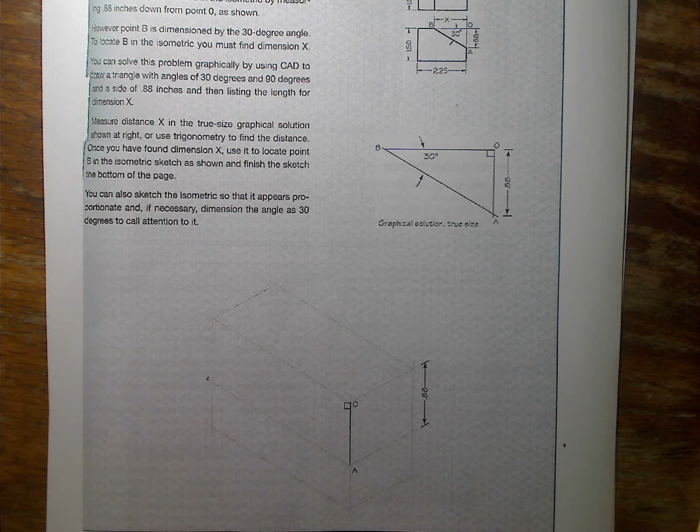Okay, our isometric drawing packet number 1 that we're practicing and learning. Now, isometrics, everything is switched, and if you pay attention to your grid paper, it's no longer the regular grid paper you've been using. Notice how everything's on the angle, because everything's on that 30-60 degree angle so that we can all draw isometrics, since everything is switched on this axis. But we're going to zoom out here.

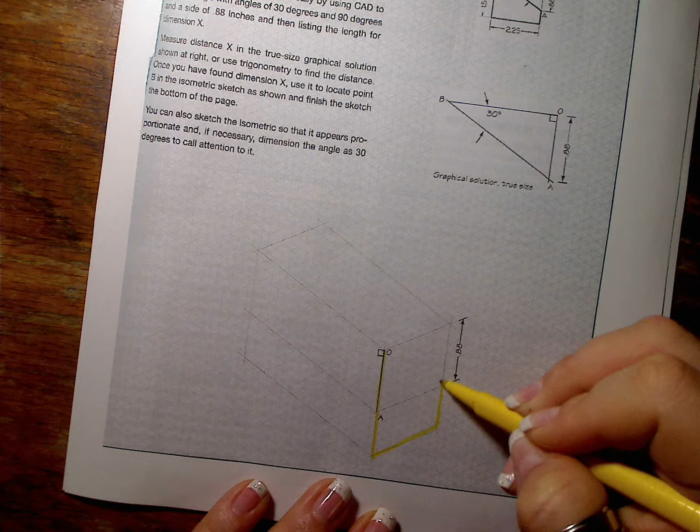Now what we're going to do is take these two views and transfer them to the box. So the first thing we do, my paper's nice and lined up, so we're going to block it in. The first couple of drawings I was nice, and I very faintly gave you that first box to start with. So that's the first thing I'm going to do, and again, always lightly draw this in. This is why I'm using the yellow, so you can see it better.

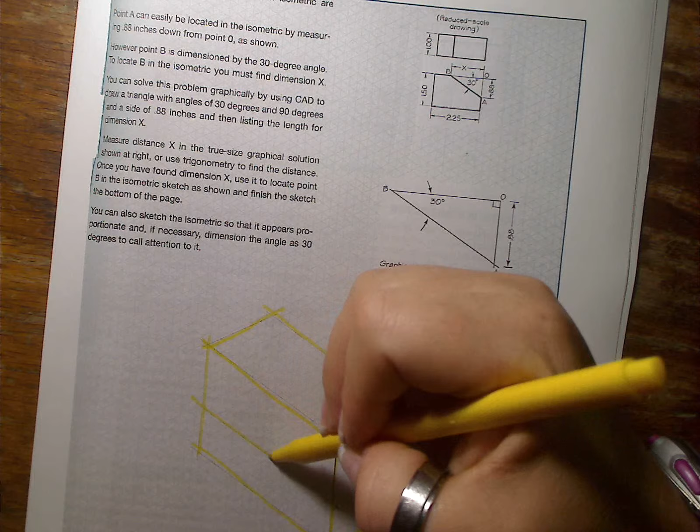Now I'm going to look at it and go, okay, what's my distance from O to A? If I look here, it says it's 0.88. If I look down here, I've already given you that distance, so we have that part right there. What we need to now get is that O to B, so we need to figure out what that measurement is. If we go through and measure it, we can figure that out, it's all there.

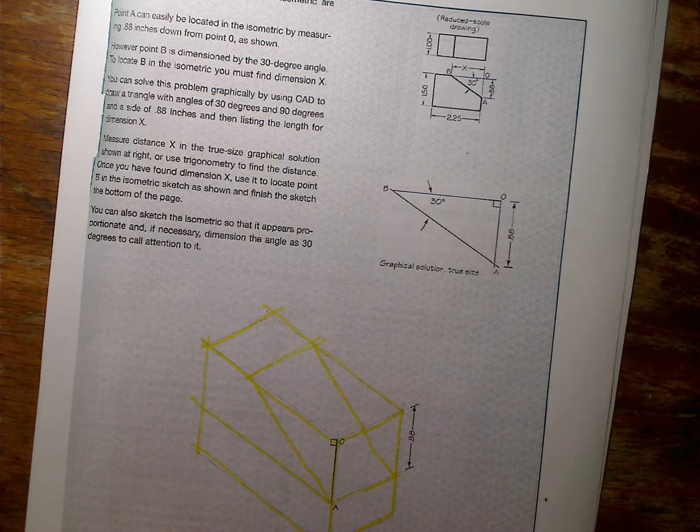What we're going to do is look at it and go, okay, if I'm doing an approximation and looking at it proportionally, what does it look like? Should go about right there. That looks proportional to that size here. Then I look at my front view and go, what does it look like on the front view? On the front view, it's an angle that comes down, so I have to draw that angle here. To continue and finish going through, I have to draw the angle in the back here.

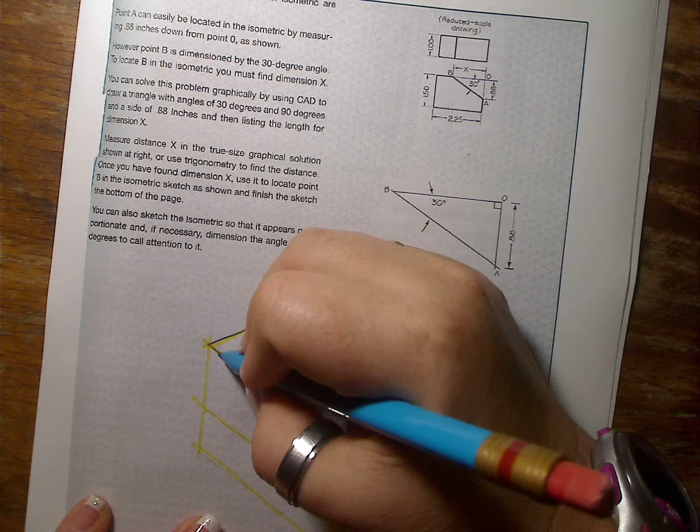So now we have a very simple isometric drawing, pictorial, that looks essentially like this. Remember, just get your triangle so you can draw your nice, perfectly straight lines. Never, ever, ever use a scale or a ruler because of the ridges on it.

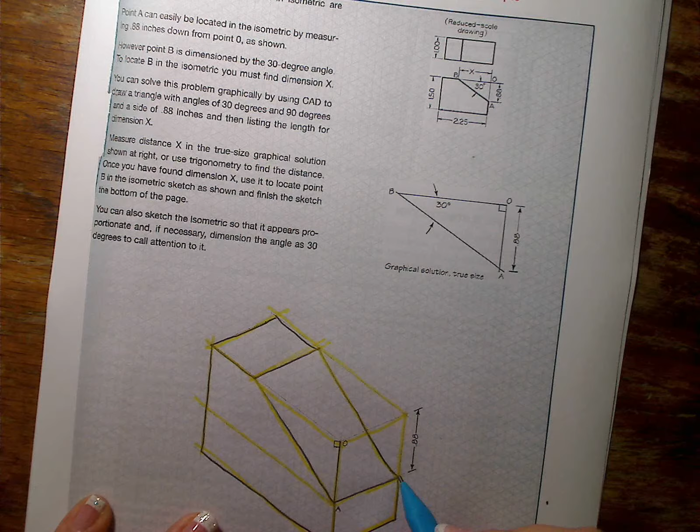Again, when you're drawing pictorials, sometimes we need them shaded just so we can see it better. And there's nothing wrong with shading. Shading is our friend at times.

All right, so we did the same thing for these. We want to draw this one. We are going to draw—I don't want to draw an oblique, I want to draw an isometric of this one. So let's go in, keep everything proportional. So I look at my box and try to figure out what my box should be.

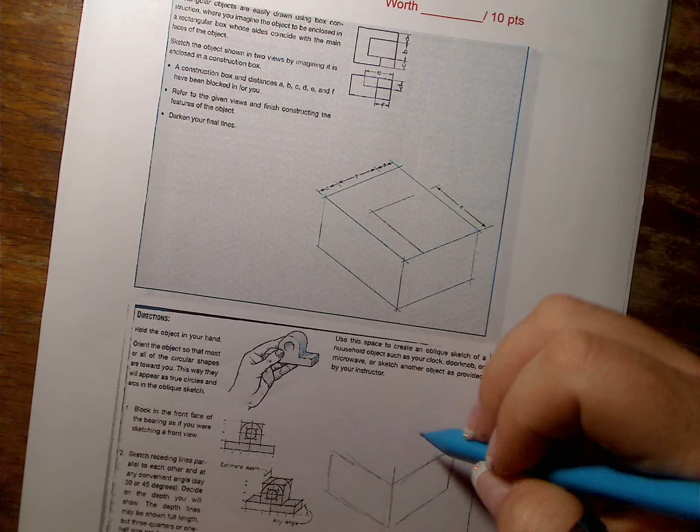Let's draw a... no, I don't necessarily like that one. So sometimes you may not like it, so that's why you always do it lightly so you can erase it.

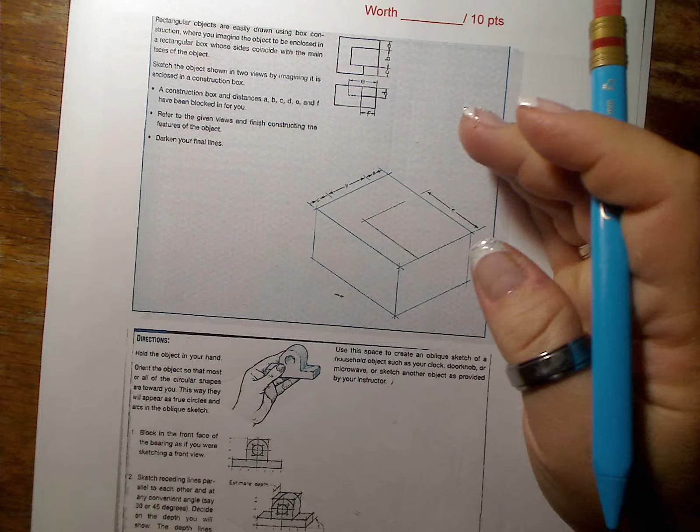Let's do a sketch, an isometric sketch of a coffee mug, just because those are pretty simple to do. Or we can do a soda can. Here, we'll do a soda can. So I'm going to proportionally sketch it, like if I was drawing a soda can here. This one I don't have to count, I'm just doing it proportionally, and looking at it, I go, no, if I'm doing a soda can, it should be nice and square, right?

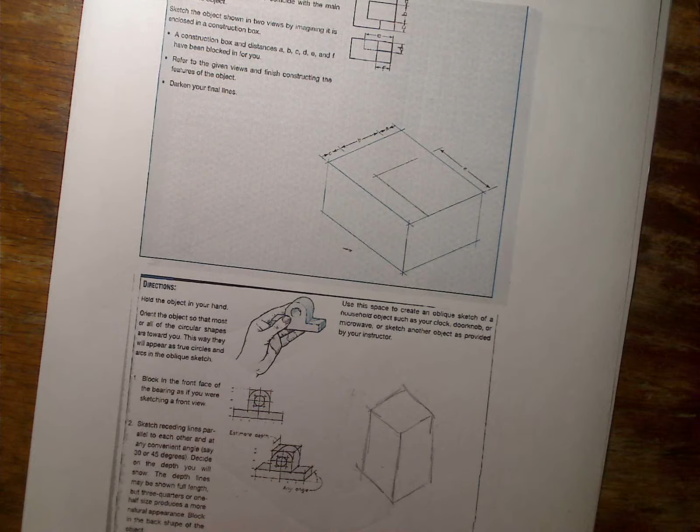So it looks something kind of like that. That's kind of my box. Let's go ahead and make it yellow.

We know a soda can, when we look down the top of it, it's circular. So I will need to find those center points. And then I'm going to have my ellipse that's going to touch in here. So I'm going to have it look something like that.

And then somewhere in here I'm going to have that opening. And I'm going to have that little tabby looking thing that goes on top of it. And now I need my body.

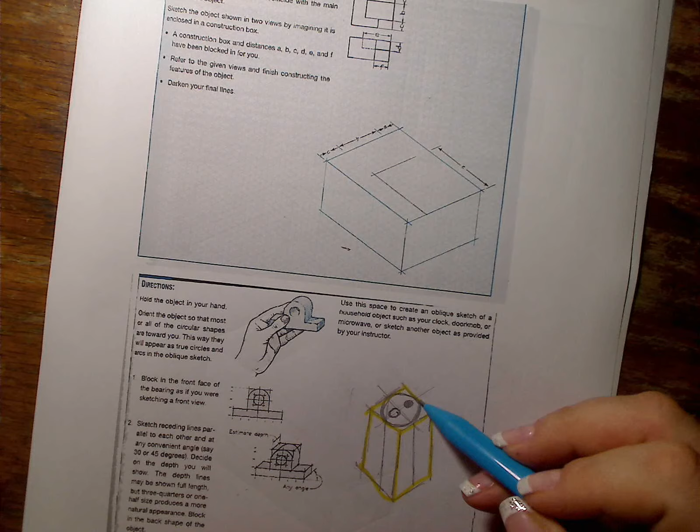Bring it down, bring it down. Bring each one of those points down to where it kind of hits that bottom of that box. If I draw through my bottom of the box, it fits there. Draw them down to where they hit those points.

Because then I should be able to draw that bottom ellipse. And then I can come back and draw it where it fits on there like that. And I don't know, I may have our little wrapping on here that says Coca-Cola or soda or whatever.

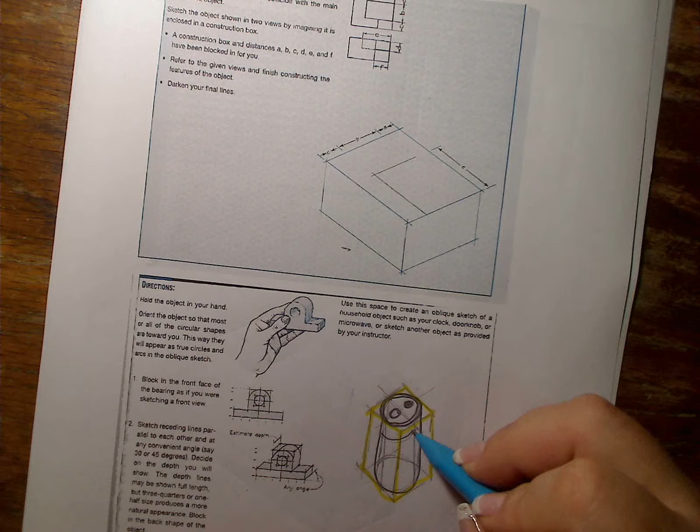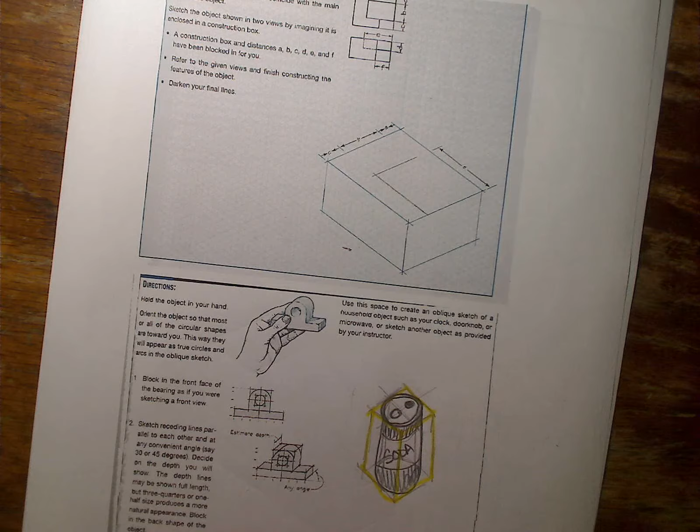All right, this one's the same thing. We take it, we look at it, we draw it. Block it in. Get your invisible see-through block.

Okay, and then you transfer your views onto it. So I look on it here and I say, okay, where would that top measurement be? That top measurement shows it coming back something like that to that.

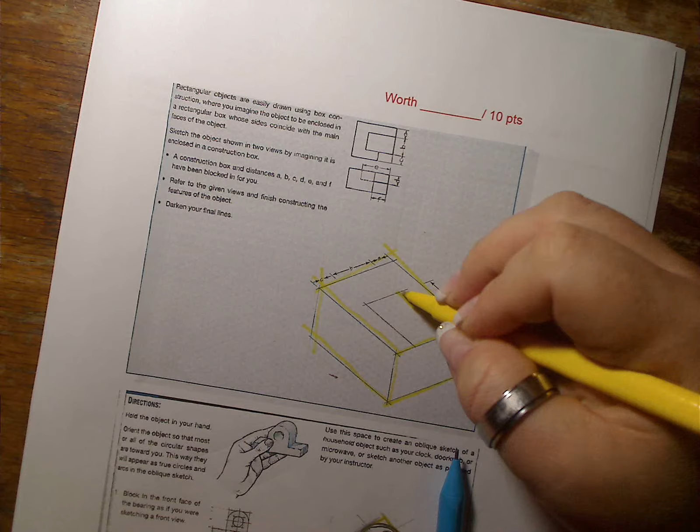Over here. Stops approximately, say about probably right there. So I got my top view, then I look at my front view.

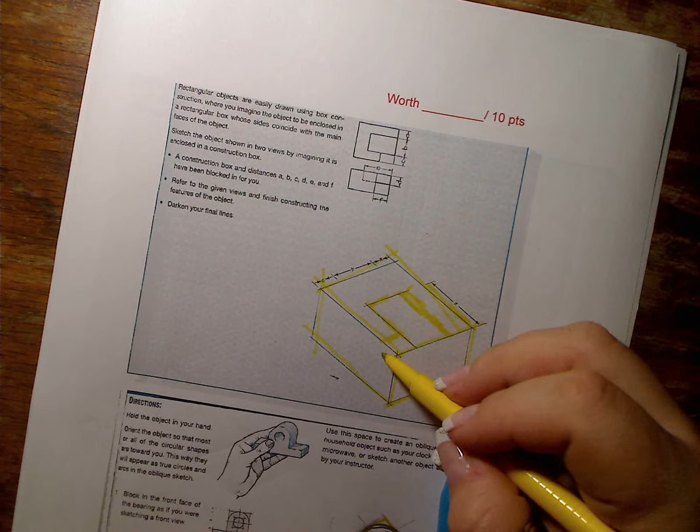My front view says it drops down, comes over. According to this, something like that.

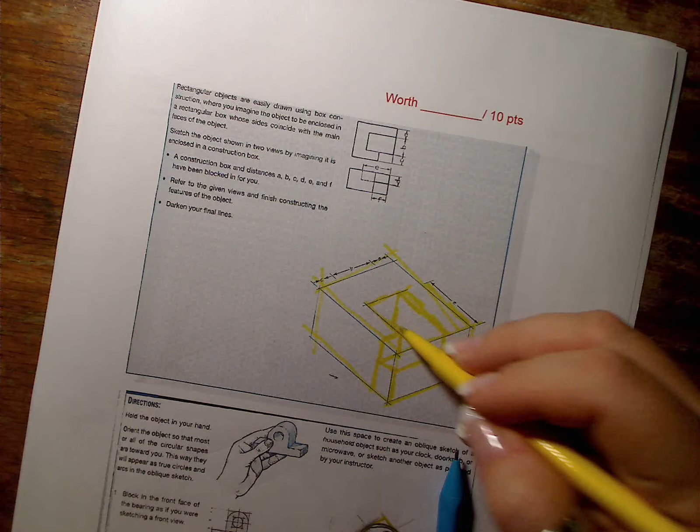And we keep going through and we draw it. Looks at something like that. And we just keep going through and we keep drawing them.

Same thing with this one. Go at it, look at it, it's blocked in, transfer your views. 2 1/4, so let's say to, what, here? My front view, I know it comes down, something like that.

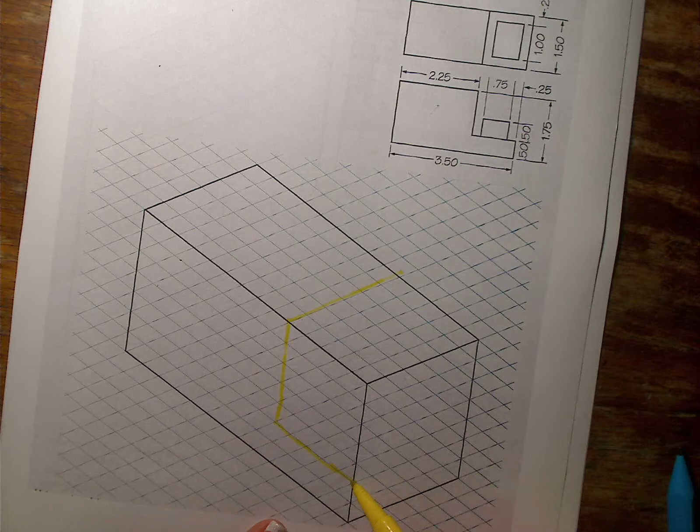I don't know, I'm doing something like this, because that's this little edge part right here. And then I know we have this little piece here, and I have to find it. I have to find where is it at.

Well, okay, it's going to be centered on this. It's going to be in here somewhere. So it looks like it's in one square, right? Looks like it's in one square for each side.

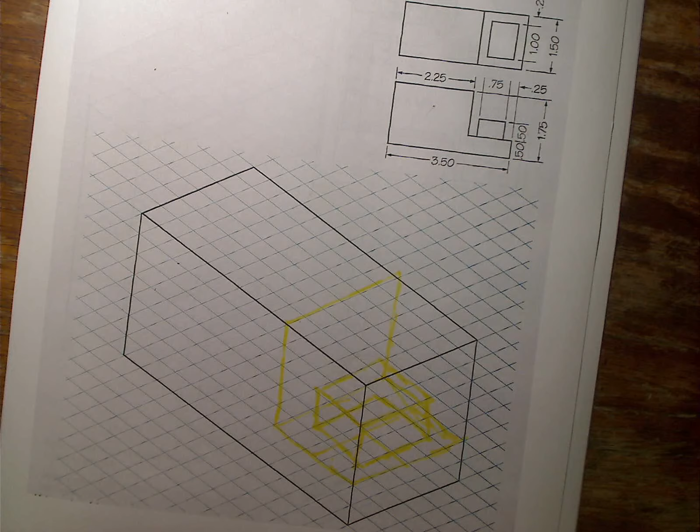So something like that on the bottom. Well, I have to actually draw it up still too. So it looks something like that. Ends up looking something like this. And I drew that one extremely fast, and then it's very rough.

Not a very good drawing, but it's just a quick representation so you can kind of get a feel for it.

So you're going to practice going through, and you're going to go practice, and you're going to draw isometrics, okay? You can do these. They just take practice. There's nothing wrong with it. You practice it. You can't see it from looking at the views.

Look at the examples, because, yeah, I'm giving you examples of what they should look like. But the more you draw it, the more it starts to make sense. Sometimes you have to draw things and look at it before it finally starts to click and go, ah, I get it. And that's all right.